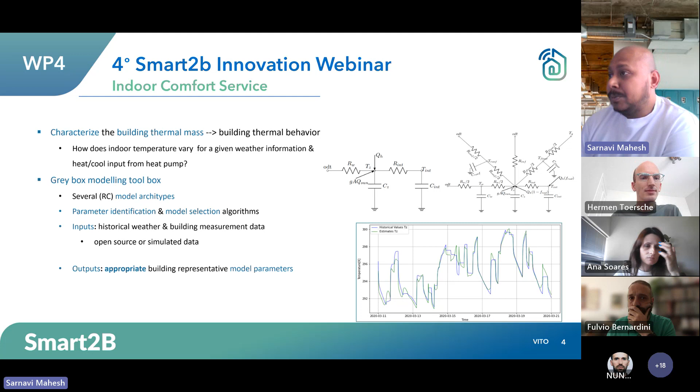Then we have the energy efficiency service. This service basically optimizes your building and asset for an efficient level of energy consumption, but the workflow is based on data, in the sense that you can generate data, or you can consume historical information, weather data, and you can train using that data to develop black box building models. And then using that model, you can generate an MPC control for that particular building and asset in combination.

What it requires is massive amounts of data, but once it's trained, you can retrain every few days or something. But once it's trained, it's quite good, and you can update the control every 15 minutes or so. One thing to add here, the energy efficiency service is also completely independent, doesn't require input from other services.

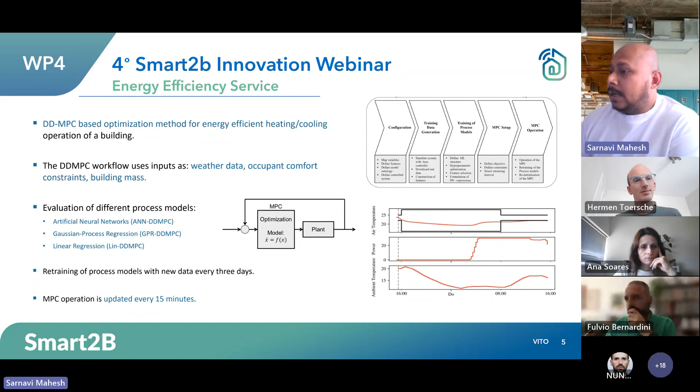Yeah, that's about it. On the flexibility service side, this one requires input from the indoor comfort service, forgetting the names now, from the indoor comfort service and the efficiency service as well. I'll come to why it's required. So to start with, the flexibility service does aggregation of flexibility and disaggregation as well.

For aggregation, we consider different storage devices such as EVs or buffers, and we also have buildings with their heating and cooling consumption. For electric vehicles and hot water buffers or any other storage device, it's pretty easy to quantify flexibility. You just need the energy capacities of these storage devices and the rate at which you can store energy in them, those kind of things.

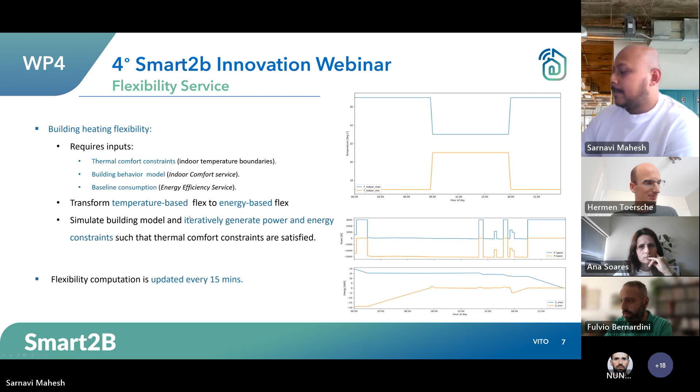So the flexibility service has flexibility aggregation and disaggregation as well. The aggregated flexibility is consumed by another service called the load scheduling service, which uses the flexibility information along with the baseline information to develop a load schedule for all the different assets, to reduce consumption costs but not deviate from efficient operation, and stay within flexibility limits to satisfy user comfort levels.

Once the load scheduling service computes a profile, that can be consumed by different services to disaggregate over different assets. But we also have disaggregation on our end. In case there are no separate services to disaggregate, we can disaggregate using a priority algorithm, which takes your total consumption profile generated by the load scheduling service and splits it over different devices according to the demand required. That's for the flexibility service.

Then moving over to the load scheduling service. The load scheduling service takes into account the flexibility information, which is also built on top of the baseline information from the efficiency service. It uses all of this information to generate an optimal load schedule based on reinforcement learning. And it also takes into account price signals from the ENTSO-E website, not static prices, but real prices from the ENTSO-E website.

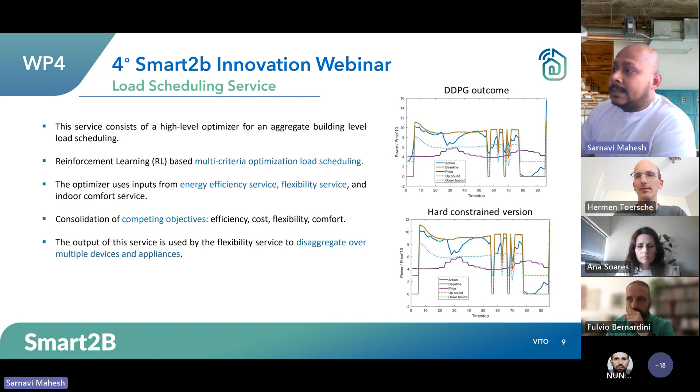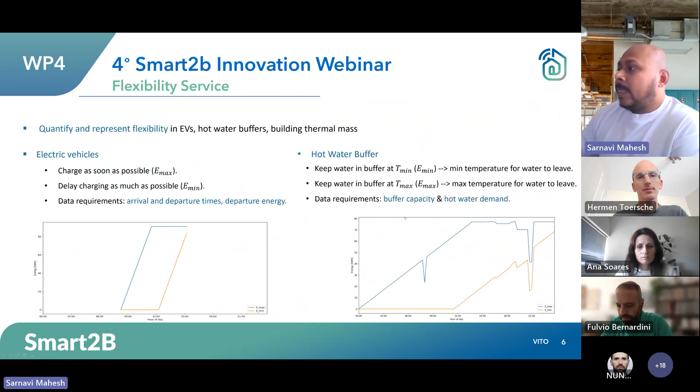Then we move over to the transversal services. The first is user-centric energy profiling. They do demand forecasting in general, but very specifically it was also done for hot water demand. As I was saying before, for the hot water buffer we require information on buffer capacity and hot water demand. So the user-centric energy profiling forecasts hot water demand, which is used by the flexibility service to develop the flexibility graphs for a hot water buffer.

The PV production is used by the load scheduling service at CERTH, and those are the two major outcomes from the user-centric energy profiling. Because these kinds of forecasts, especially the water demand forecast, require a heavy amount of data, they adopted transfer learning. They developed their model using massive amounts of data from one building, then transferred it to a different building, tuned it quite a lot, and developed this forecast service that can forecast energy demand for different buildings. The model is retrained every 3 days, and forecasts are updated every hour.

Okay. Sorry, we're going a little bit too long. Okay. So if you can please speed it up. Thanks. Yeah, I'll go quick then.

Okay, so we have the air quality assessment system, which is developed at CERTH, and it's mostly a recommender system. They use historical CO2 concentration, temperature and relative humidity from the sensors we have on the pilots to forecast for the next hours. For the infectivity modeling, they use a Wells-Riley probability model, which is a pretty old probability infection model from medical science.

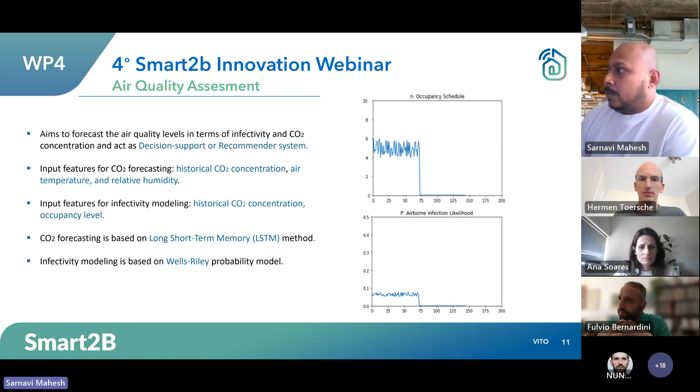Then we have the predictive maintenance and degradation for different devices. It uses zone and outdoor temperature and energy consumption for different devices. It's a non-intrusive method, just to check if the cooling or the operation is as expected or not over different zones, and uses synthetic data to do the training.

Then we have user in the loop actuation, mostly for legacy devices where you cannot control them using some kind of actuator. There's an interface to the building owner or the occupants where you can display not the schedule per se, but show what to do at certain hours, and then you can also get feedback from them.

This is the performance assessment driver. It basically checks what kind of functionality you have, if you have smart controls or not, and then gives a number between 0 and 4, and can also suggest upgrading certain actions or measures. This is finally the services framework, where all the services interact through a message queuing service using the consumption and publishing approach. That's all.

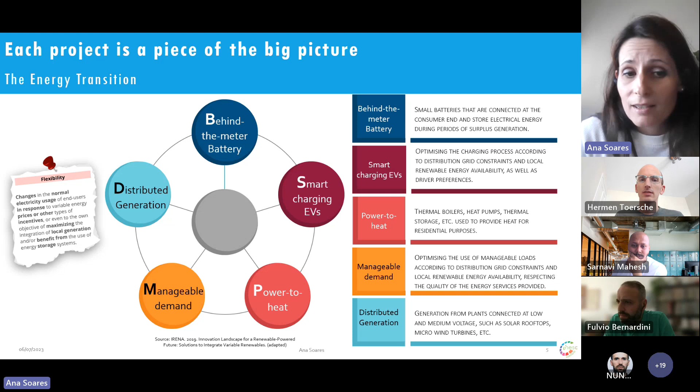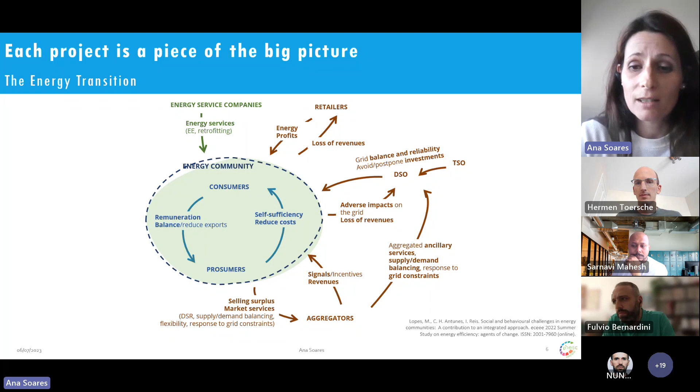So working on the demand side with the objective of triggering flexibility, there are several energy resources that can be used: stationary batteries, electric vehicles, power to heat, manageable demands, and distributed generation. What I want to bring in with this picture is that several entities are involved in this energy transition. Not only consumers and prosumers, but also energy communities, aggregators, the DSO, the TSO, retailers, and energy service companies, with different objectives that sometimes are quite conflicting.

So working on these projects, what we typically do is use optimization models. These can be of two types. We can talk about multi-objective models, in which decision makers are in general at the same level of decision and cooperation may exist to reach satisfactory solutions. This is done by assessing the trade-offs between competing axes of evaluation.

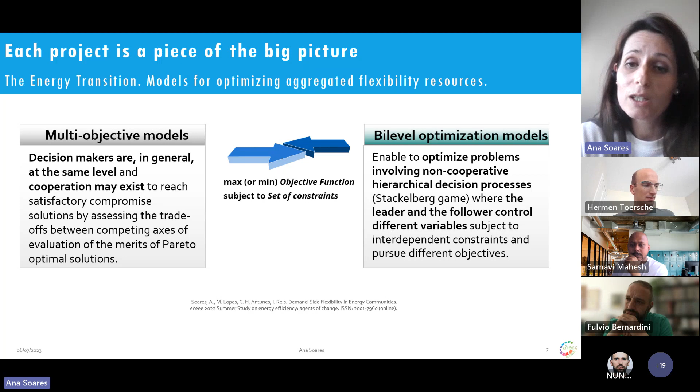Or we can talk about different levels of decision, like when we apply bi-level optimization models. In this case, we are optimizing problems involving entities that don't cooperate with each other. Typically in these models we talk about a leader and a follower: while the leader controls different variables, the follower reacts to the signals that are given.

To make this more concrete, let's take the situation in which we have the TSO, the DSO, the BRP as balance responsible party, the aggregator, and the prosumers. We can see the aggregator as a leader that wants to minimize the cost of imbalance satisfaction. As followers, we have the prosumers that aim to maximize profit by changing their supply and demand and providing flexibility based on the prices proposed by the aggregator.

Another example, let's consider the relation between the DSO, the aggregator and energy communities. While the DSO wants to minimize operating costs, subject to active and reactive power balance, voltage limits, and line power constraints, the aggregator aims at maximizing its own profits.

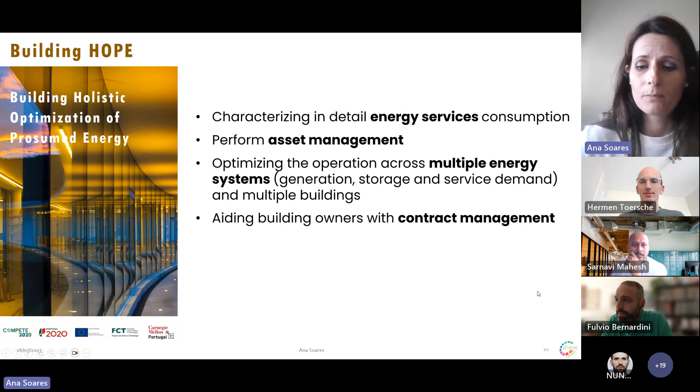So now I'll just give you a brief overview of some of the projects that we currently have at INESC, or projects that have been recently finished, like the one presented in this slide. Here we have the Building Hope project, building holistic optimization of prosumed energy, in which INESC's main role was to characterize in detail energy services consumption, perform asset management, optimize the operation across multiple energy systems, and aid building owners with contract management.

The next one is ESGRIDS. We were not alone in this project, also not on the previous one, of course. And the aim was to develop novel solutions and technologies for future challenges of the smart electrical power, with three main aspects: the distribution grid, the market, and the energy end user. And once again, it is here that we are acting at the part of the end user. Also, the part of behavioral demand response cannot be left aside. The bi-level optimization appears here in the definition of dynamic tariffs for network use and energy.

Next project, models and algorithms for automated standalone and aggregated energy management systems to enhance demand response in small and medium enterprises and residential sectors. Our focus, control energy resources that are suitable for demand response. Develop bi-level optimization models to study the interactions between retailers and consumers, which are endowed with home energy management systems. The part related with behavioral and organizational dimensions that influence demand response flexibility.

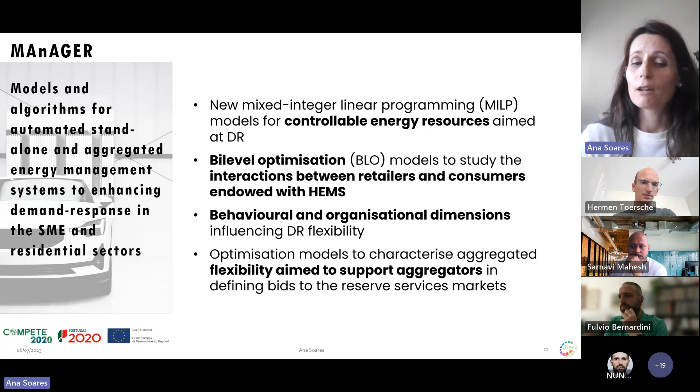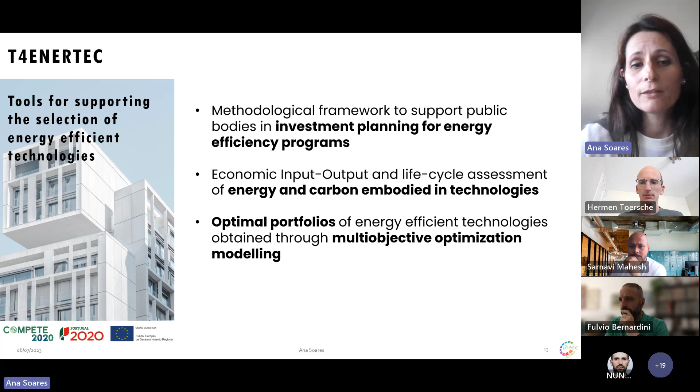Optimization models to characterize aggregated flexibility aim to support aggregators in defining, for example, their bids to the reserve services markets. Tools for supporting the selection of energy efficient technologies. Develop a methodologic framework to support public bodies in terms of investment planning for energy efficiency programs. Also the part of evaluating energy and carbon technologies. Optimal portfolios for multi-objective optimization modeling.

Corporate power purchase agreements. That's another project that we are currently involved in, and which involves studying current models and structures, assess the risks that are related to or that appear during contract negotiation and how they affect contracts, but also evaluate drivers and barriers to the implementation of this type of purchase agreements.

Another area that we've been acting in is the part related with flexibility markets. So currently in Europe, there are already aggregators acting, but the truth is that there are several barriers to their participation in flexibility markets. So one of the objectives of this project is precisely to identify those main barriers, but also to design optimization models to assist demand-side flexibility aggregators' decisions.

Another area is energy flexibility in agriculture, okay? So there is also flexibility in specific sectors such as agriculture. We are currently studying several electrical loads in the agriculture sector that can be relevant for flexibility. And we are also assessing the farmers' availability and willingness to participate in energy flexibility markets and services. And this project has also pilots, which will provide us even more information on it.

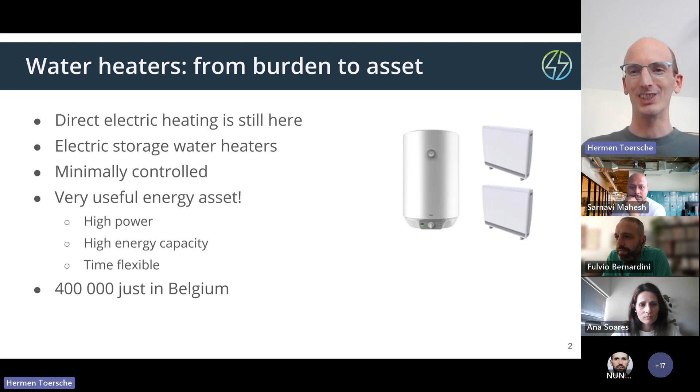Nevertheless, this could be a very useful energy asset because they consume a lot of power. There's a lot of energy storage potential in them, and in principle it doesn't really matter when you consume. And there are 400,000 of them just in Belgium. So that's where we started. So we retrofit water heaters with a smart controller. We optimize it in the cloud, and we control it using local devices installed into the water heater.

The typical goals that we try to achieve are energy efficiency. So rather than heating up the vessel all the way to maximum temperature, we try to make it as cool as possible without violating comfort. That gives significant savings in radiation losses, typically 20%. We also use the water heaters for demand response services. So these are commercial services that we sell to aggregators. And we also use it for home energy management in some cases. So that's mostly self-consumption and peak shaving.

It's a relatively young company. We've been working on it for about 5 years. It's a quite educated workforce. So we have several PhDs working on the algorithms. We have a lot of collaborations with academia in R&D projects. And recently, we've also entered a partnership with Ariston, who's also a major manufacturer of water heaters.

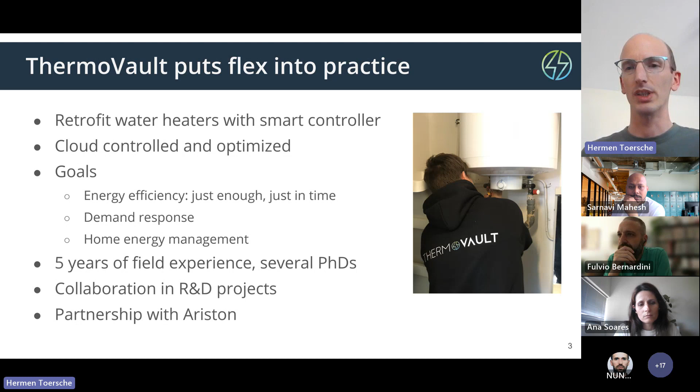So towards smart buildings, I see several challenges that we've mostly seen in the context of research projects that we collaborated in, and that are also starting to pop up in practical projects. So in terms of communication, I see two main challenges. On the one hand, if you want a smart building, there should be some kind of communication between the devices in the building to make sure that their behavior is interoperating.

If you go towards the implementation, it will become clear that it's not evident that devices will talk to each other, especially if you consider multiple vendors who have provided the devices. Everybody should agree at least on a subset of standards to be able to interoperate. And in the current practical environment, it's not really clear which standard you should use. I think by now there are about 20 serious contenders for communicating between devices in a smart building.